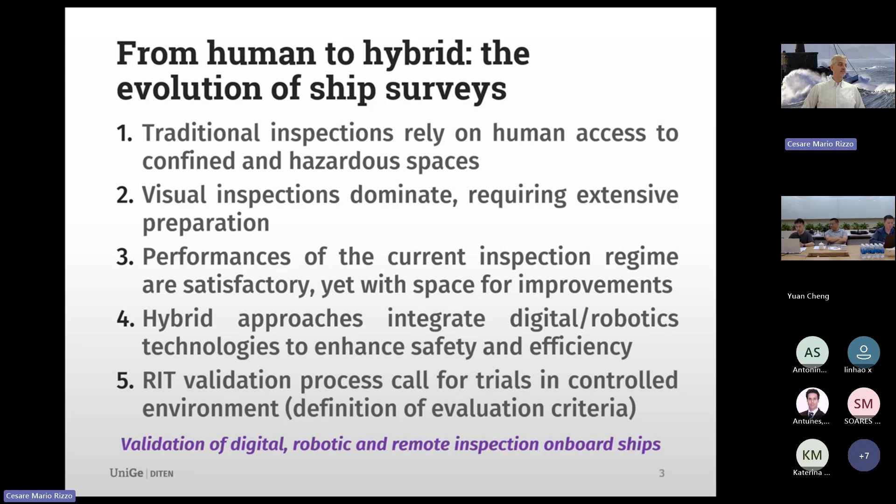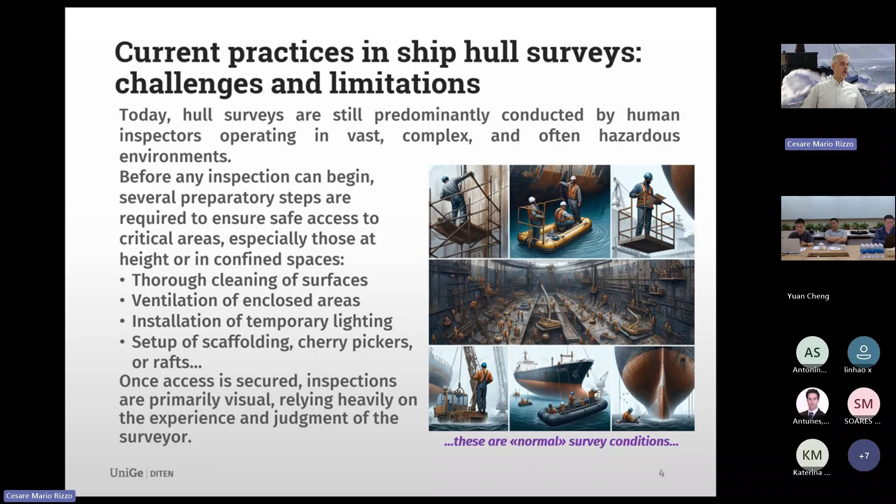Basically, today, I don't have to tell you that the inspections today are human-based, and they are mainly visual inspection, and the means of access are the ones that you well know. And I well remember, because I was a surveyor, what it means to be on a scaffold, to be on a raft, and to work as a surveyor in the field. But let's step a little bit back.

What means an inspection? What is the rational framework for an inspection? We should try to summarize what is an inspection by asking ourselves why we do an inspection. So we do an inspection for safety, environment, efficiency, and everything. And then we should ask ourselves who is doing the inspection, when we do the inspection. So at a point in time, but with the age of the ship,

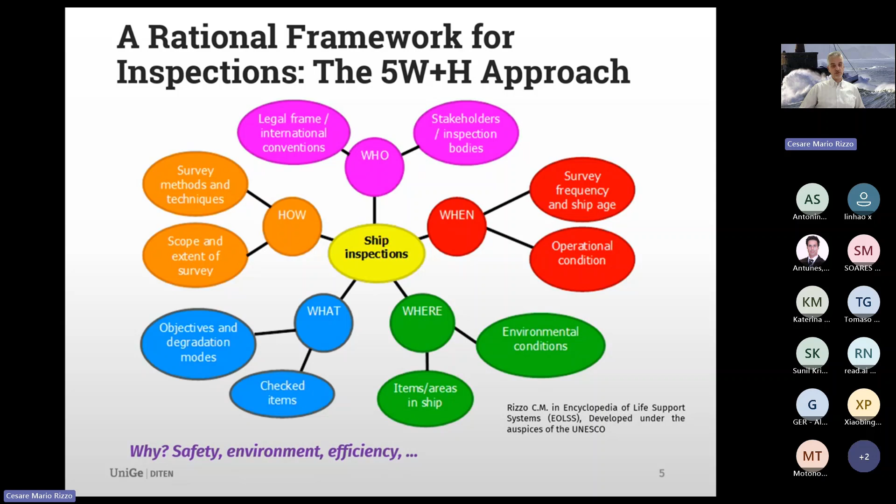which operational condition. So when, in a broad sense, where we do the inspection, where means where we are looking at, or where in the world we are, what we are looking at, which item we are checking, which degradation mode we are looking at, and how we do that. So we are looking at the survey methods, and we are looking at the scope and extent of the survey. And then we have different technologies.

At that time, I mean, 5 or 6 years ago, we started the project, and we tried to involve in the project really 3 or 4 families of technologies. But these families of technologies means not only robots, not only aerial drones, but technology as a whole. I mean, we have a robot, we have a drone, but we have the camera, we have the streaming video, we have the telecommunication, we have the piloting aids, and so on.

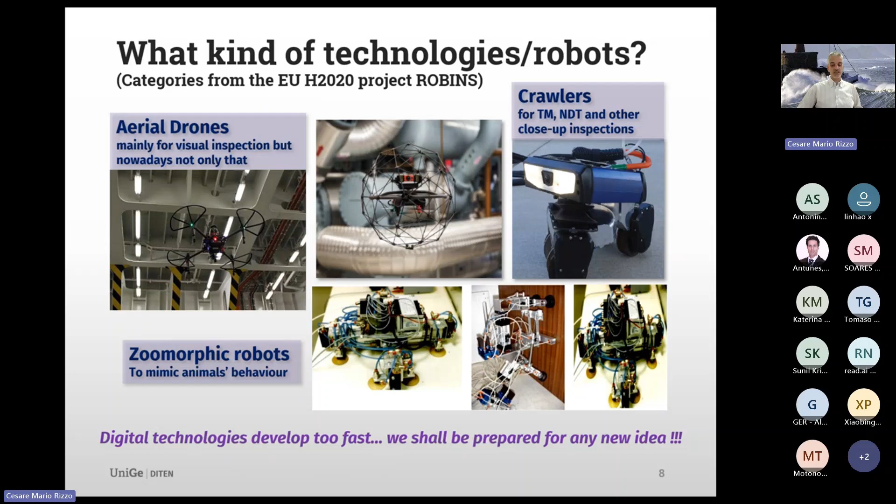So we are trying to use technologies, but these technologies are really developing a lot, and they are developing very, very fast. We shall be prepared for any new idea, but we should also take into account that we are using combined technologies. Thickness measurements 6 years ago were just beginning or maybe not available. Now they are almost available, almost reliable. That means a new era, because we involved a new technology in a combined robot with several other technologies.

But then at that time, and even nowadays, we are asked, which are the challenges in validating the digital and robotic inspection on board? Why we need to validate? It's clear. We need to validate the technology because we would like to have a reliable inspection result. But to do that on board means that we have a limited availability of ships and crews. It may happen, as we saw, that there are some ships available, but not many ships to make a huge statistic.

It's difficult to have a broad range of degradation conditions. You can't have all the degradation conditions and effects you wish to assess. You need to have trained personnel, and that personnel should be trained for novel techniques because technology is advancing. Of course, the guidelines are not available. If we are here, there are no internationally agreed

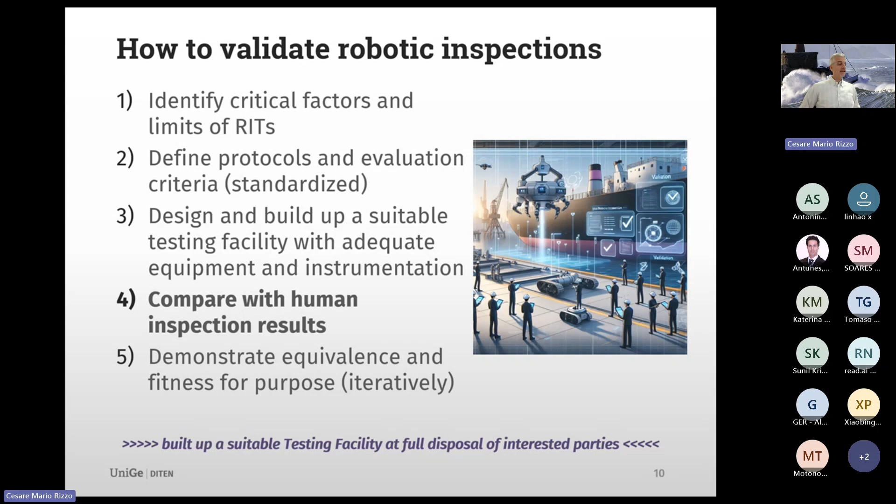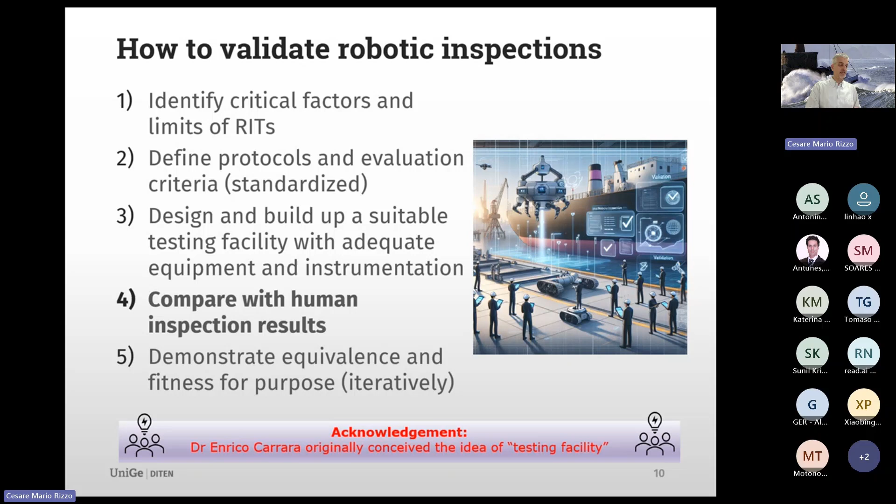And let me say that this idea to create a testing facility for standardizing the validation of robotic inspection came from a colleague that passed away, unfortunately, but he really conceived this idea. And this idea was conceived because of this reason that I'm trying to explain now.

If we think that RIT systems, robotic inspection or remote inspection technologies, are a measurement system, then we need to grant for this system the basic measurement theory principles that are accuracy, precision, repeatability, and reproducibility. These are mentioned in every textbook about theory of measures.

Accuracy. Accuracy means you have to demonstrate the closeness of a measurement with the true or accepted value. But then you need a true or accepted value that is a comparison term, that is the truth for you. Then the truth is hard to define on board. You cannot find the truth, at least because you don't know exactly how many defects you have on board in advance. So accuracy cannot be granted with reliable terms on board.

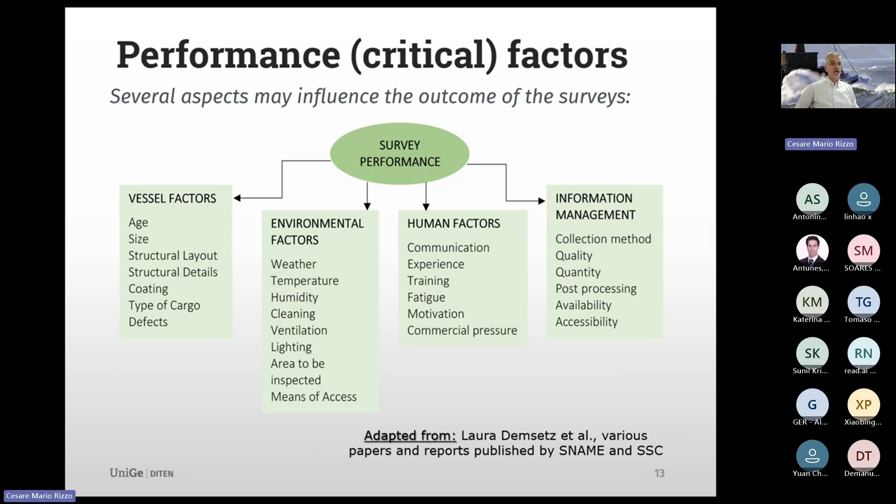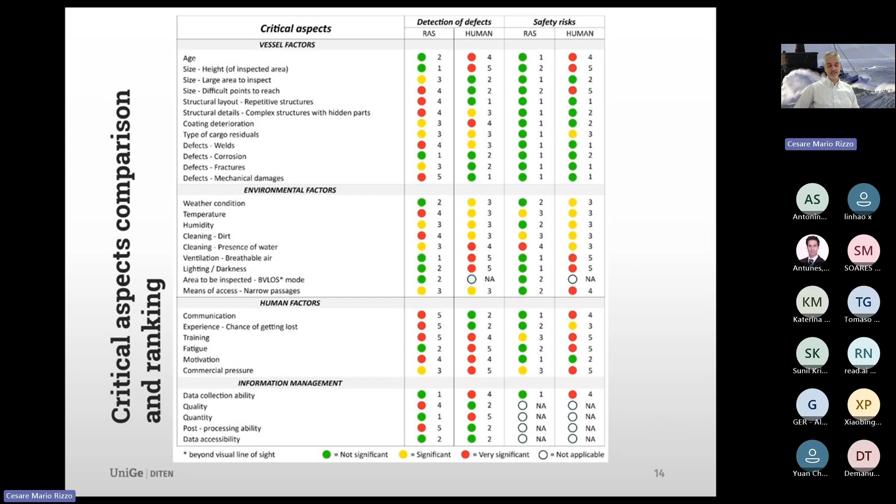I go quick. After that, we really started to define the protocols, the objective evaluation criteria, and to build up a testing facility to carry out validation trials of any robotic technology. I mean, a drone with a pilot with some technologies for streaming and so on. And then we decided to have testing protocols for any new technology you can imagine.

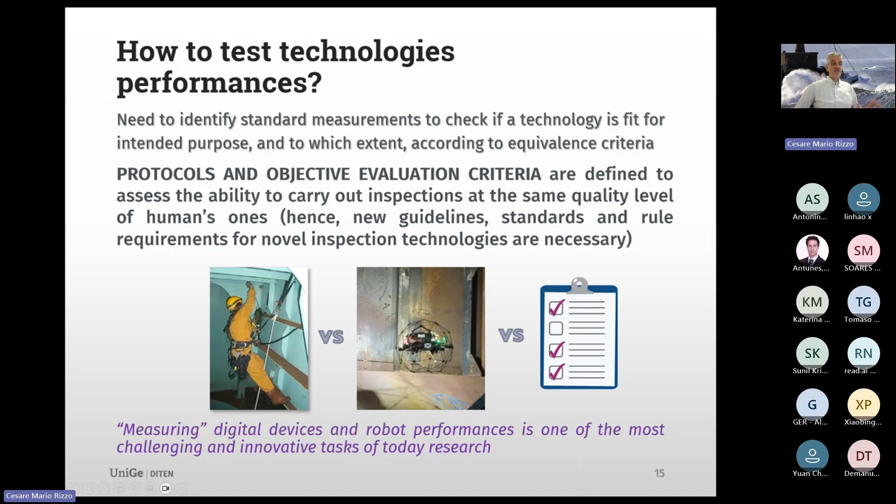How to do that? Demonstrating the equivalence between the robotic technology and the human inspection, but doing that in the framework of a testing facility and a testing protocol. So currently we have several protocols assessing several aspects of the implementation of remote inspection techniques, ranging from piloting skill to operating skill to mobility, dexterity, to the operating time to satisfy the inspection goals, how much time you take for one thickness measurement.

If the human inspector is an order of magnitude faster, we don't need the robotic technology. We need robotic technology that is equivalent, which means also as efficient as a human inspector.

Which kind of preparation and which kind of measurement you are going to take: thickness, of course, but also the shape of a dent, the size of a crack, and so on. And we also need to demonstrate the video streaming effectiveness.

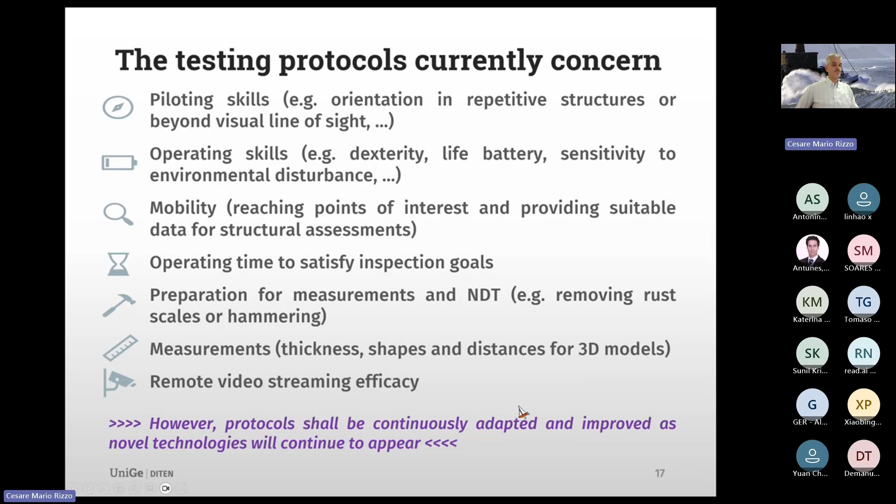So we started to develop this testing facility, and nowadays we have a dedicated environment that is providing some stakeholders an easy and economical way for assessing and developing digital technologies. We have stakeholders coming here to do trials, to discuss with us, to take advantage of our previous experience.

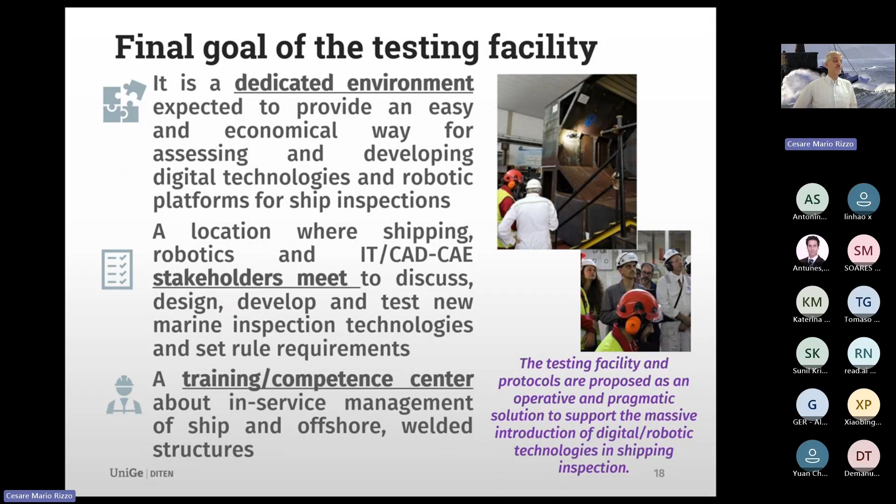We did testing, putting together several stakeholders, but we also realized that we need some training. People involved in robotic technologies are not aware of the problem of the ship, and ship inspectors and surveyors are not aware of the reality of the technologies. We have wonderful technologies that are really ready to be used, but they must be used in a proper way.

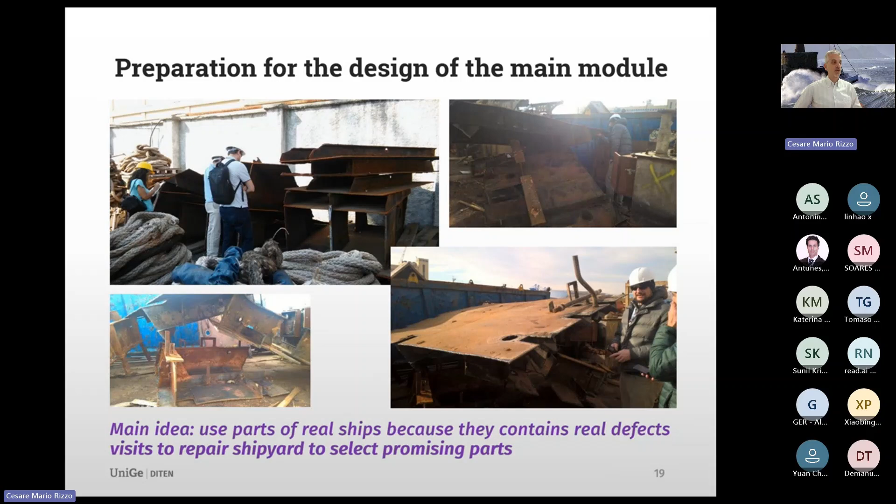So I would be very fast in telling you how we prepared the testing facility and the protocols. We went together with colleagues - these are a few of them involved in the preparation. We went to a repair yard to take parts, then we brought the parts into our lab, and then we started assembling a testing facility that is nowadays shaped like this.

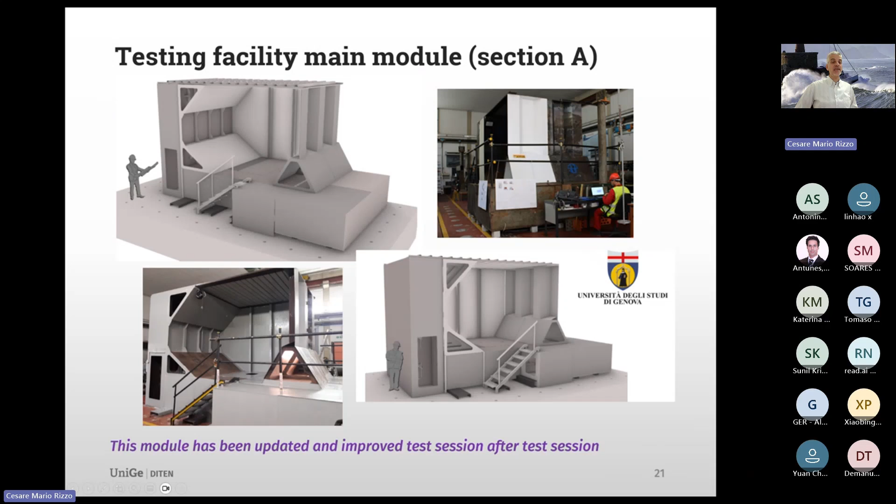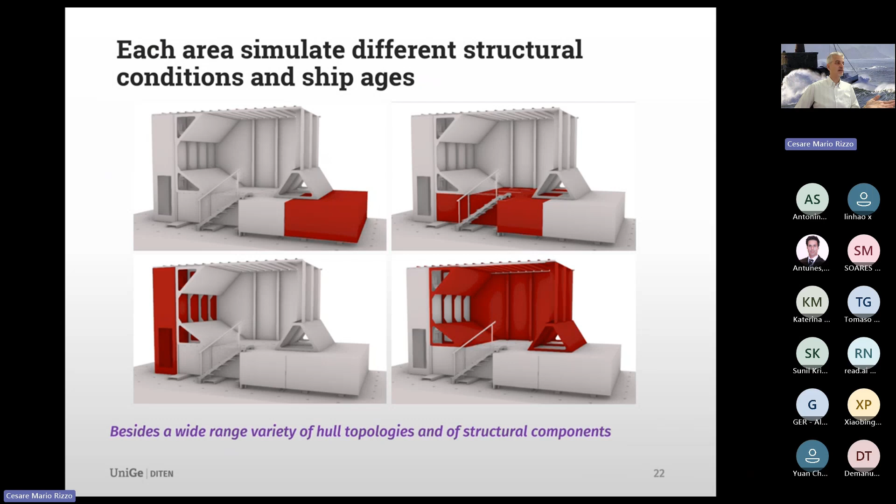This testing facility has been improved during test sessions, one after the others. Section A nowadays includes several parts with different structural conditions, representing different ship ages, different possibilities of lighting, and a wide range of hull topologies, from bulk carrier to bulkheads to double bottom structure, double side structure. So we have several possibilities, and we can create different environments: sprayed water, dark or light, and so on.

And we can create different protocols - different exercises, so to say - for our pilots, robots, and superintendents or inspectors.

They need to work together. We learned that they need to work together, but it's not easy. When you have a ship superintendent or ship surveyor working together with the pilot of a drone, they need to communicate properly. We have a protocol to understand whether they are able to communicate.

This is somehow training, but it's also related to the technology. We need the technology to make the communication possible, not only when the surveyor is not on board, but even when the surveyor is on board. If you are piloting a drone, maybe it's too difficult to communicate with the surveyor - you cannot pay attention to the surveyor communication if you are really concentrated on piloting. So we need to create a protocol also for communication.

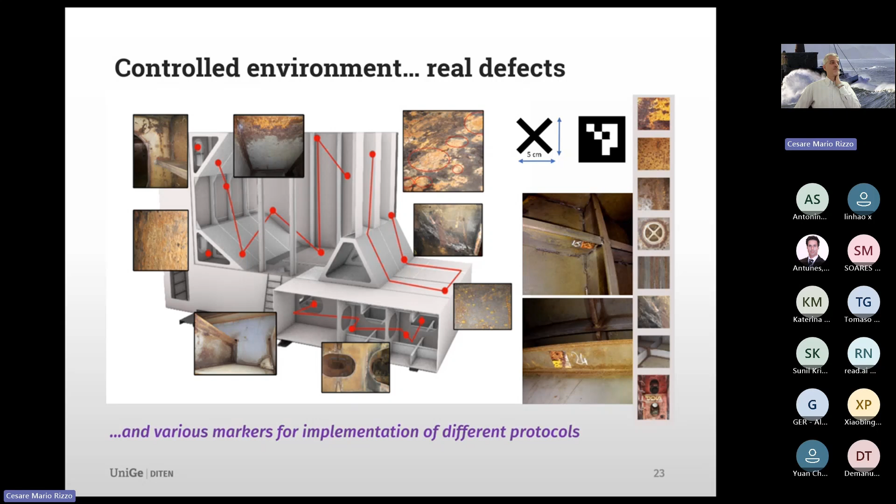Meaning that the training and the technology should be regarded as a whole, as a unique, essential system. And then we created also section B and section C, other parts of our testing facility.

Where we carry out specific testing that assesses very, very specific aspects of the technology. And we are continuously creating new protocols.

One very interesting test is a blind piloting test in a section of the testing facility. You have a pilot - you see in the bottom right of the slide - the pilot is outside looking at what is inside a tank, a cargo hold, and so on, but he is not aware of what is inside.

Then we created several repeated structures. Such repeated structures make some confusion - they are the same color, with no reference point - and basically what happens is that the pilot is lost, is not really able to localize the robot, or to localize him or herself in the space. That is a very important testing protocol we carried out.

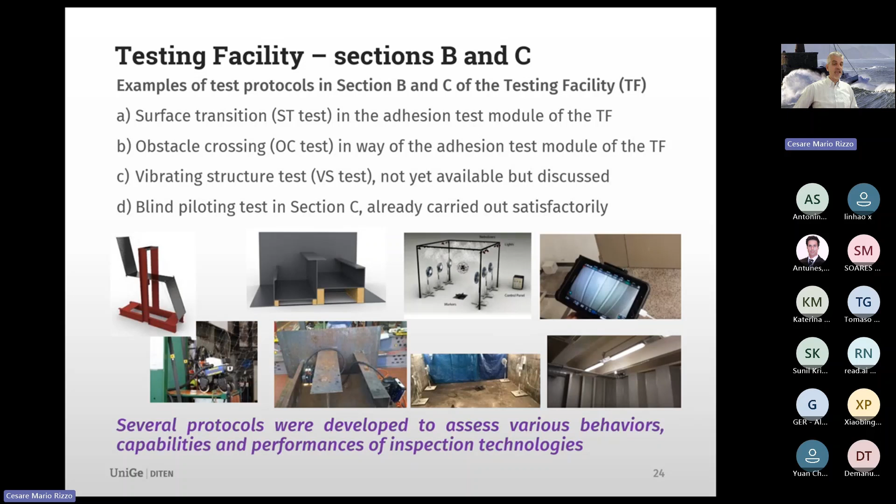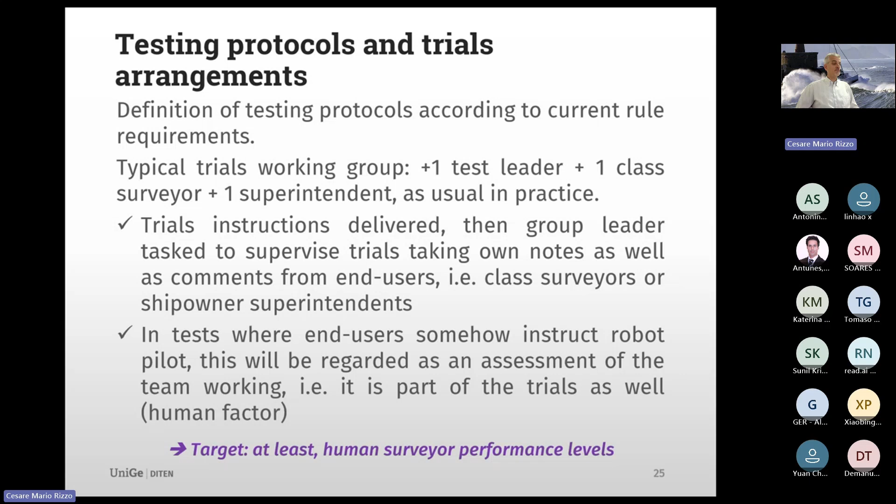And it means that we need again to take into account the human factor. Generally, we have a trial arrangement formed by one test leader - one of us directing the trial - then a class surveyor and a superintendent, depending, and then probably a pilot or someone dealing with the robotic or digital technology involved. Then we carry out the protocols and check whether the performance is at the same level as a human surveyor.

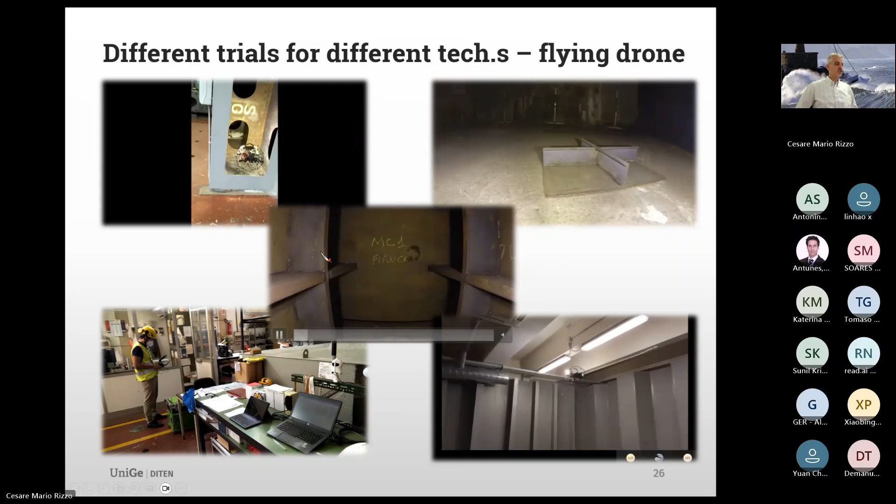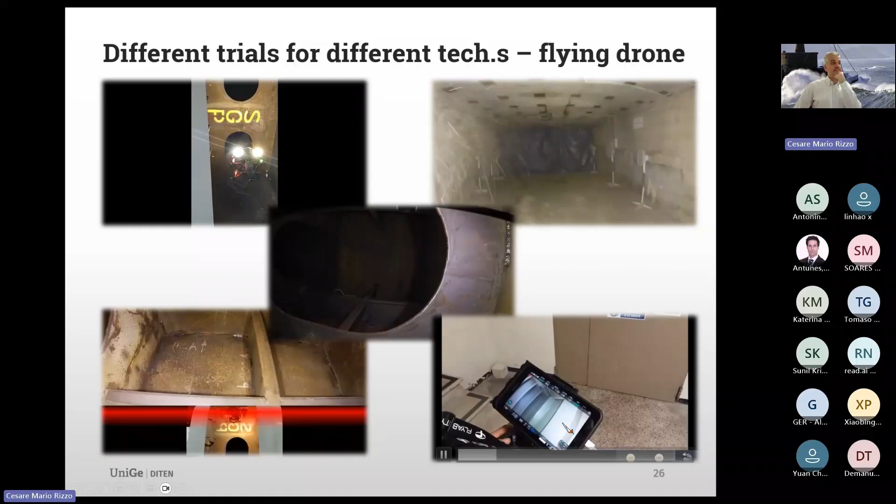For instance, you see here a few videos of the trials, just to show you what is inside the testing facility nowadays. And these are the videos I mentioned - this is another section of the testing facility.

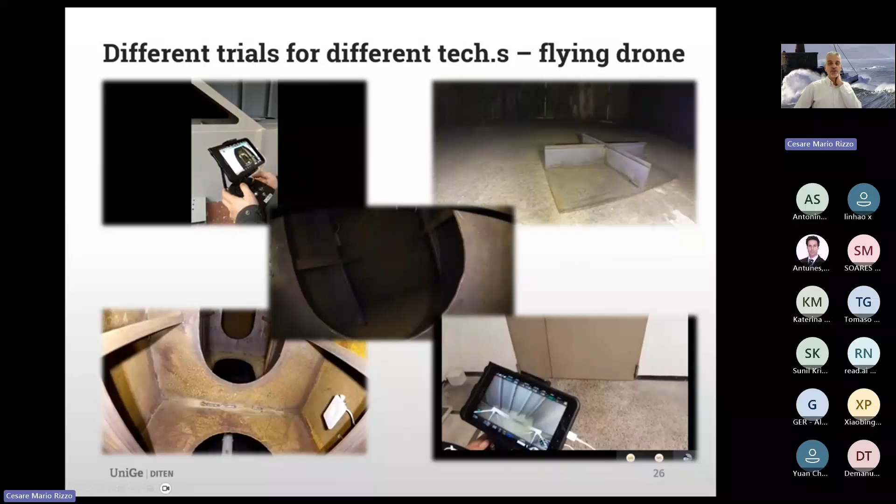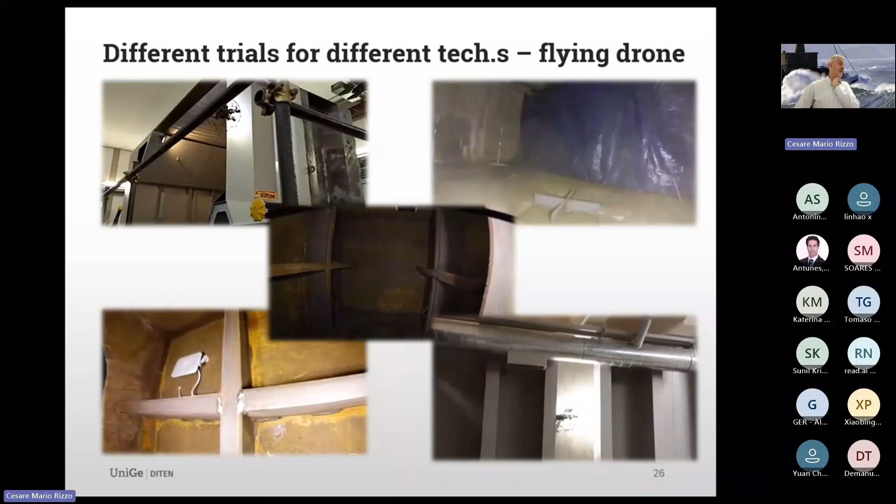Dirt space, dust space - they are really dangerous for robotic technologies. We had a failure of a drone because of the dust at the very beginning. Nowadays, the engines of the drones are protected much better from steel dust.

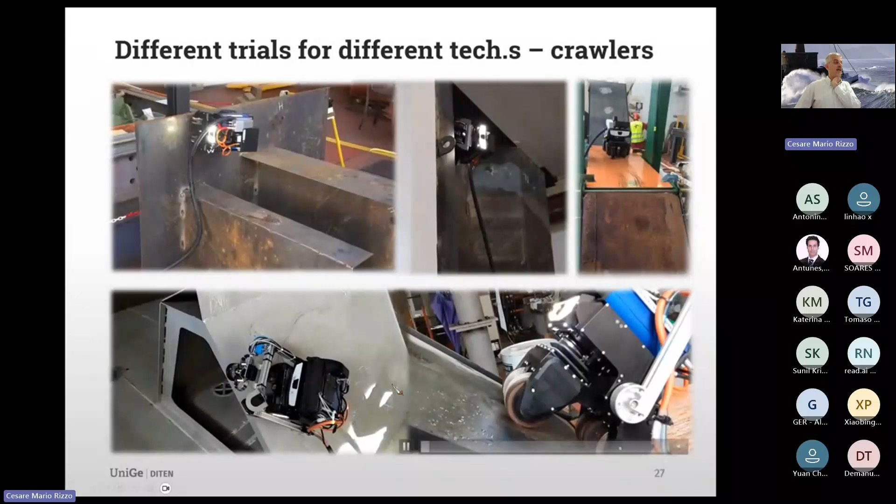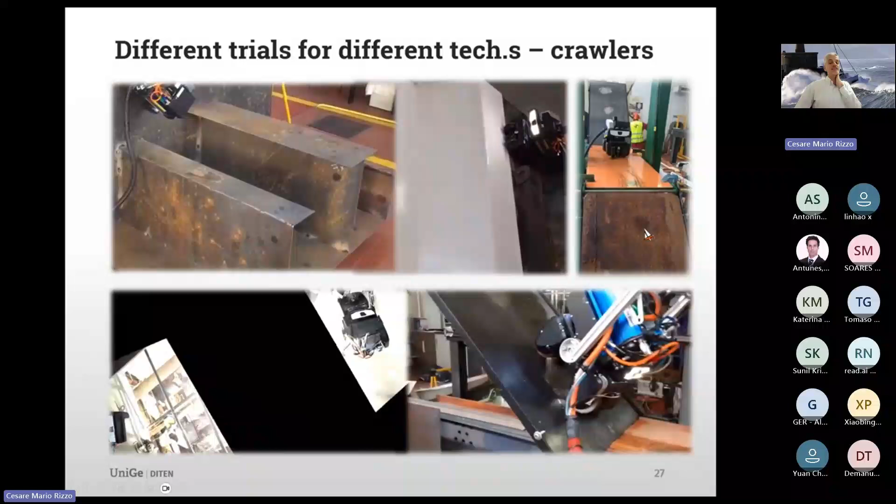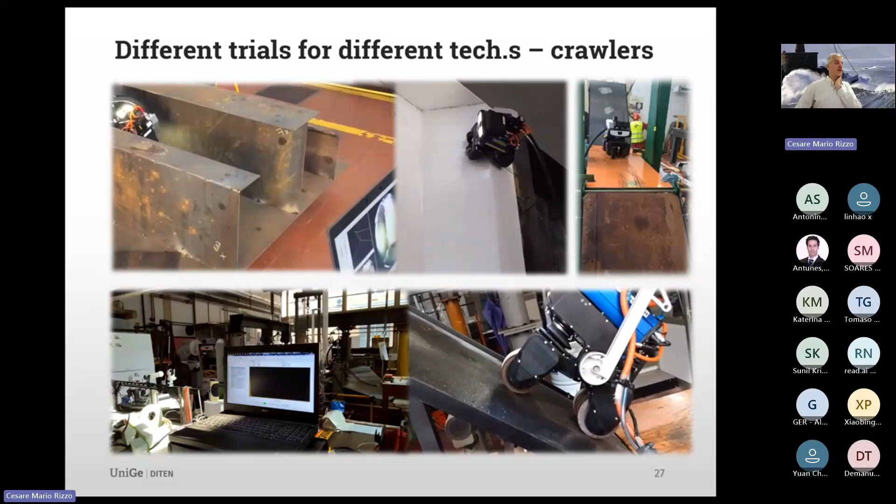Just to show another one, we had this crawler taking measurements and reconstruction with LiDAR. We had several different painted and rusted surfaces. This is to show you that this crawler was piloted from remote - we had the pilot of the crawler in Switzerland, and the inspector, the class surveyor, in UK.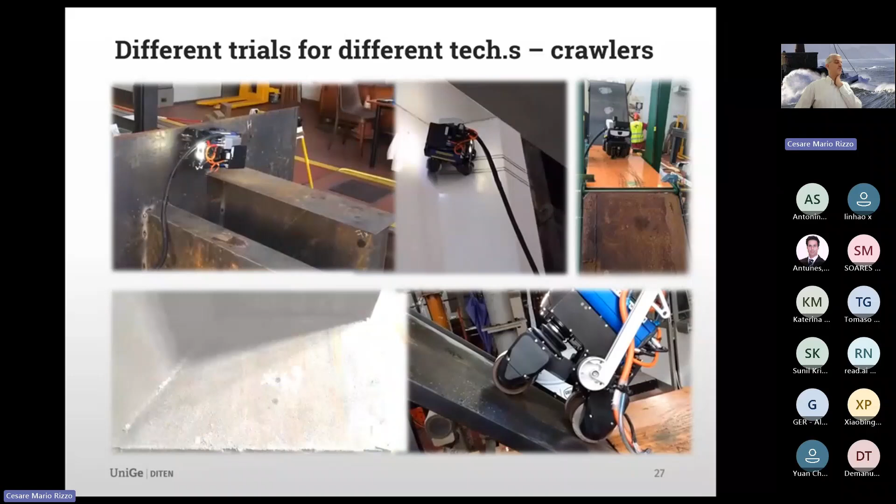Of course, we are in Italy. We had the ship superintendent from the ship owner in Naples. And this was the first trial carried out completely from remote.

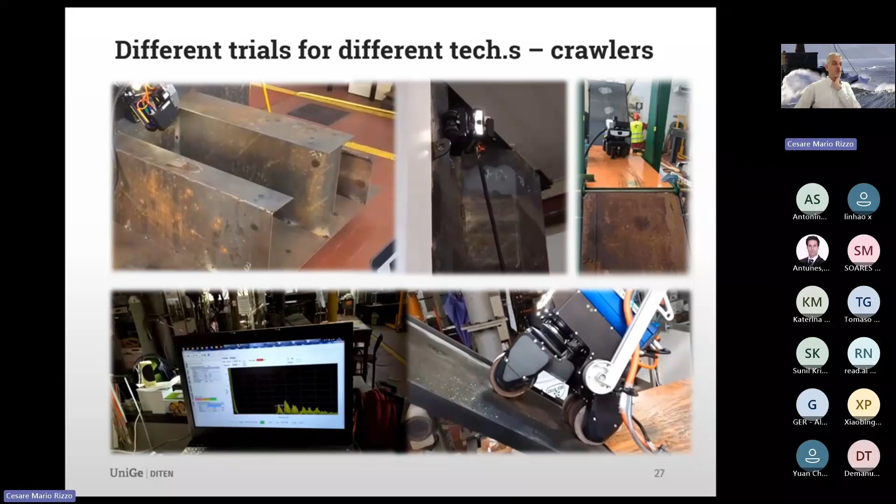But I don't want to forget this part of our trials.

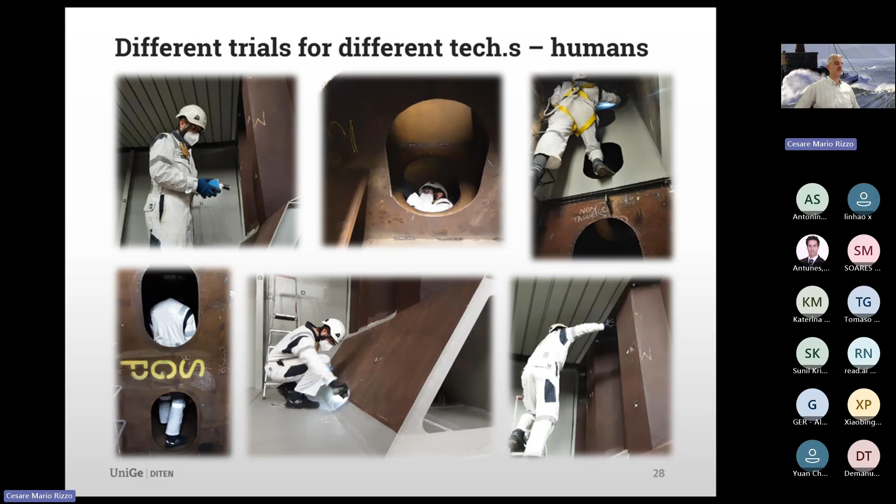All protocols have been also carried out, or can be carried out, by a professional surveyor carrying out in the testing facility the very same protocol that we are going to ask to carry out by the robotic or digital technology, by the remote inspection technology system at large.

And then we have this kind of trial assessment. That means the test records are assessed according to certain parameters that we have found. One of them, for instance, is time. The other is accessibility. And then we have different trial cards that we have associated to any type of protocol.

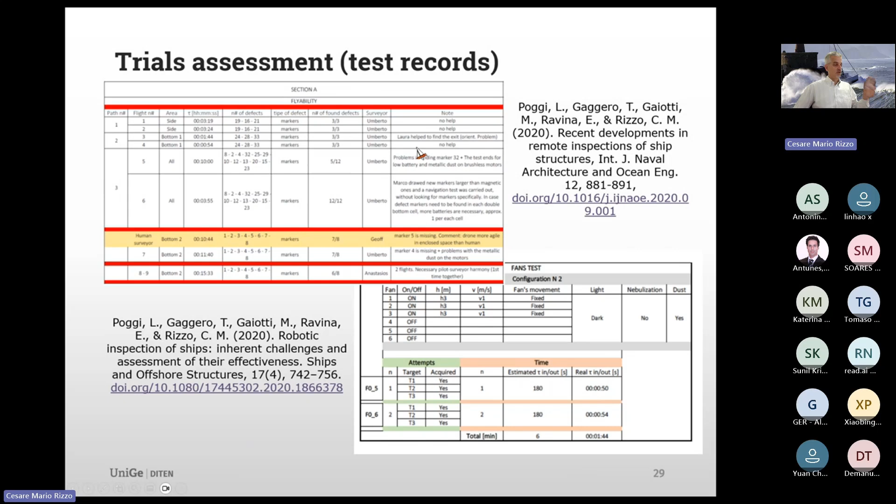And we are continuing to describe new protocols, because every time we have a new technology, we can try to assess the technology in our facility. And I would like to stress again the fact that we have a complete technology, but this technology is used by humans, and the humans need to be involved, to be considered in the validation as well.

We have a team, like any survey, that is the class surveyor, the ship superintendent, and everything is together to create a judgment of the structural condition.

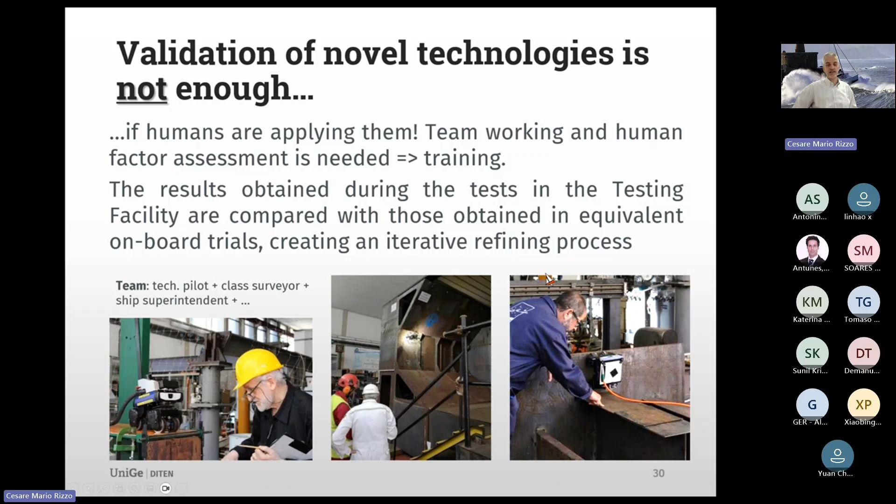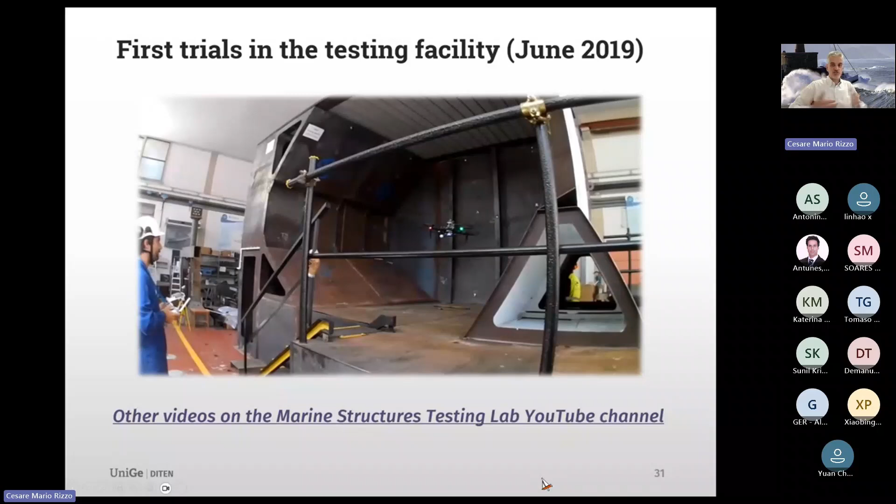So in the end, I would like to show these trials in the testing facility. I will be quite fast. This is the very first trial in the testing facility. You see that at the beginning, the testing facility was not fully painted, was painted only in certain parts. But then in the years, we evolved.

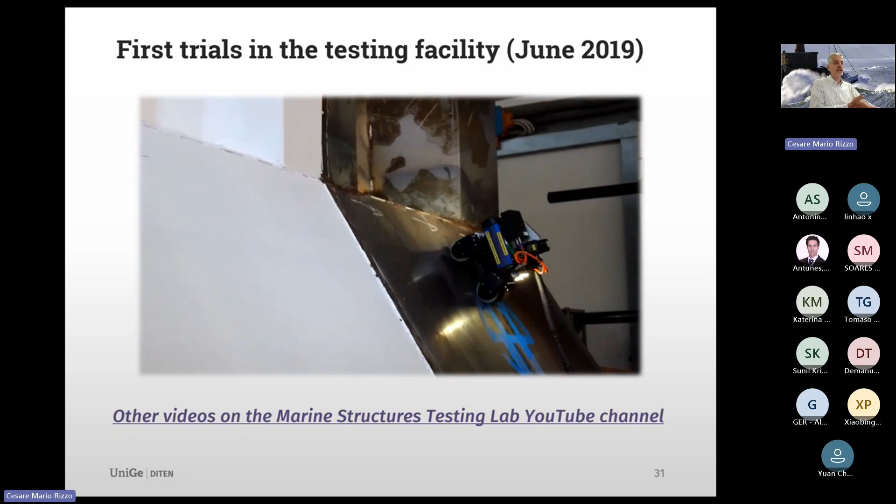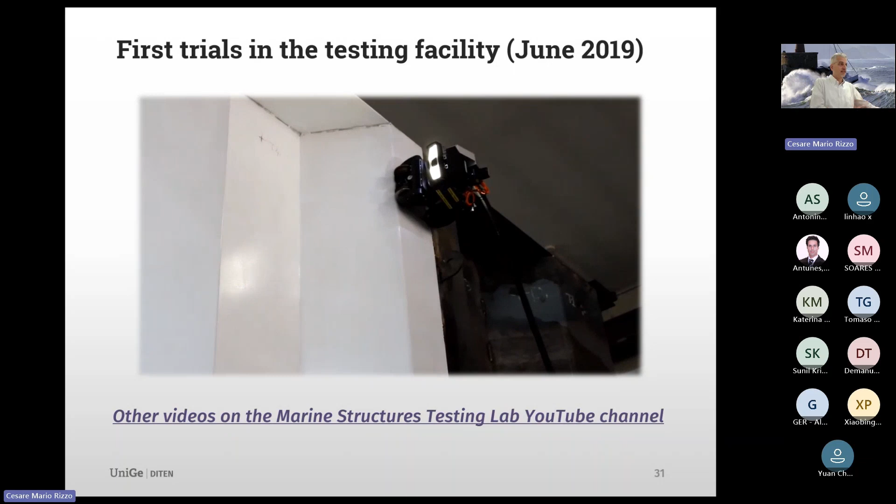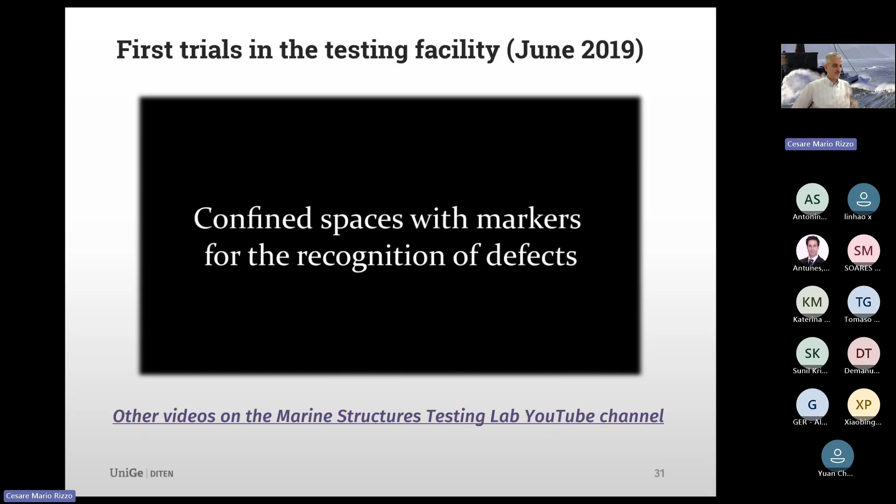We painted the surfaces because we carried out some adhesion tests of a crawler, and we realized that the coating can be ruined by the crawler, and then we need to take care of that. So the technology should not destroy the coating. And nowadays this crawler is perfectly okay. The robotic developer was able to improve the technology somehow, beside validating it.

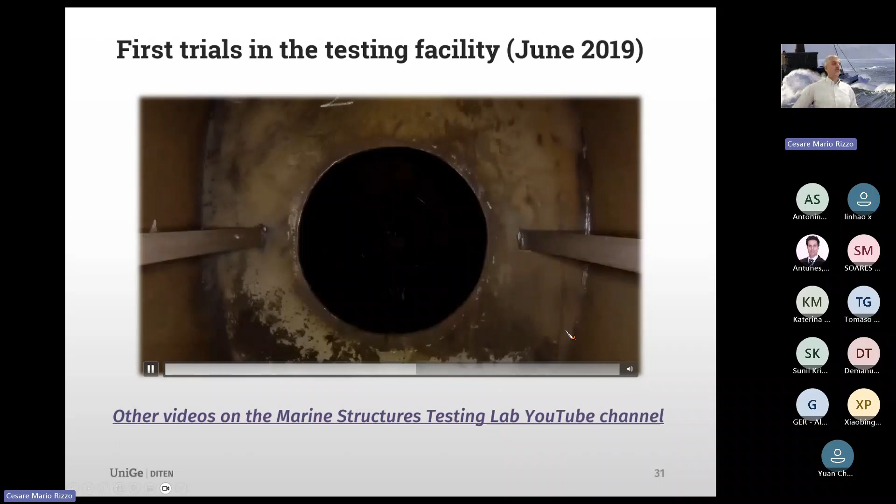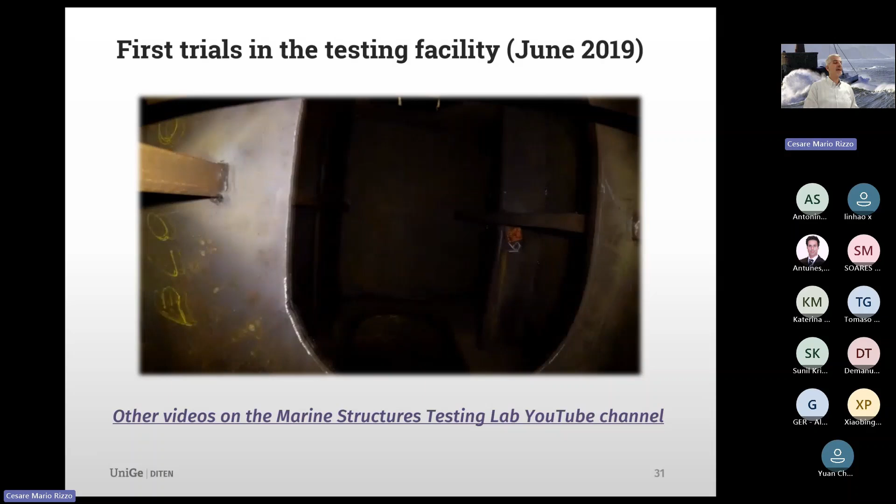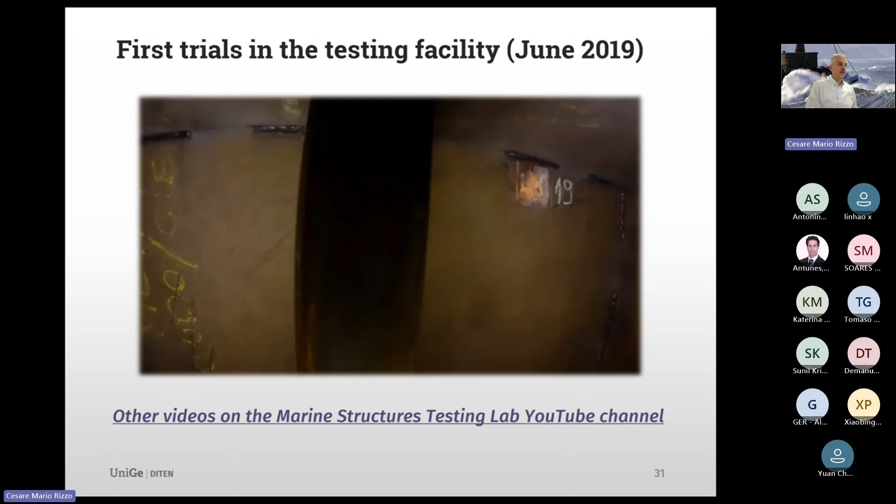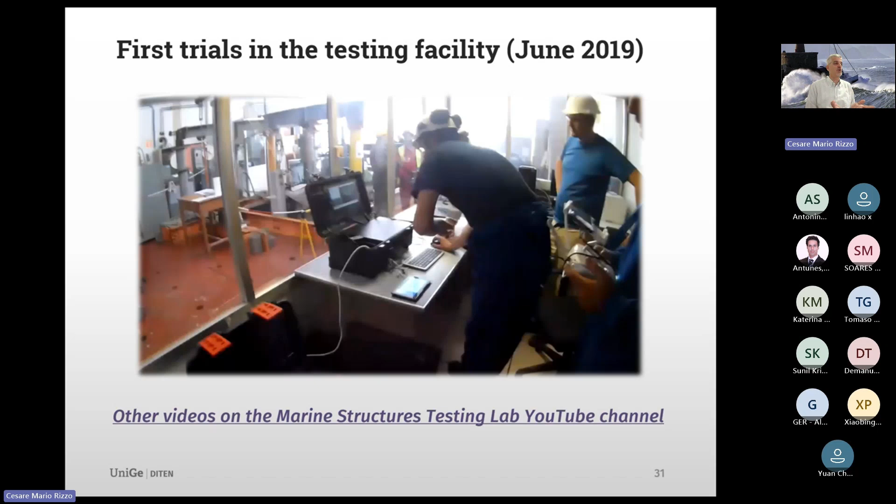And we realized several possibilities. We created some markers. For instance, now we have markers that can be moved around the testing facility, so that the many defects in the testing facility can be changed, and we can create new paths to have a blind trial. If you carry out a trial, then the same pilot is now aware of the defects. The test is not anymore the same test as before.

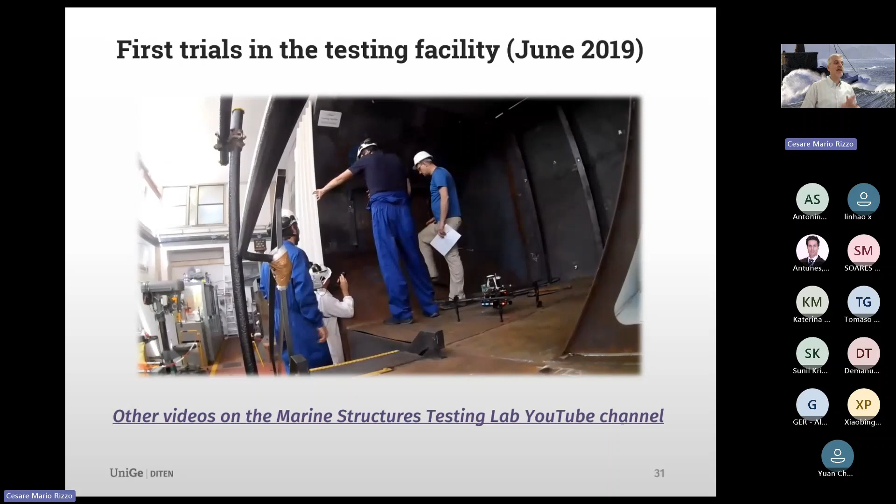When a surveyor boards a ship, he is going to inspect something completely unknown, but then we need to reproduce the same trials, so we need to have some new thing to see, and then we cannot repeat the trials in the very same way, with the very same surveyor.

So what we are doing now, training is a focus for us. Training and validation continue to be a focus. We are now engaged with autonomous technologies. This is, of course, future of research. We are discussing about coating.

We are discussing about looking at the weld seam, so welding process, repairs, and so on. We are still looking at harmonization in a goal-based perspective of practical procedure training, and to speak a common language in digital technology is very important in our opinion.

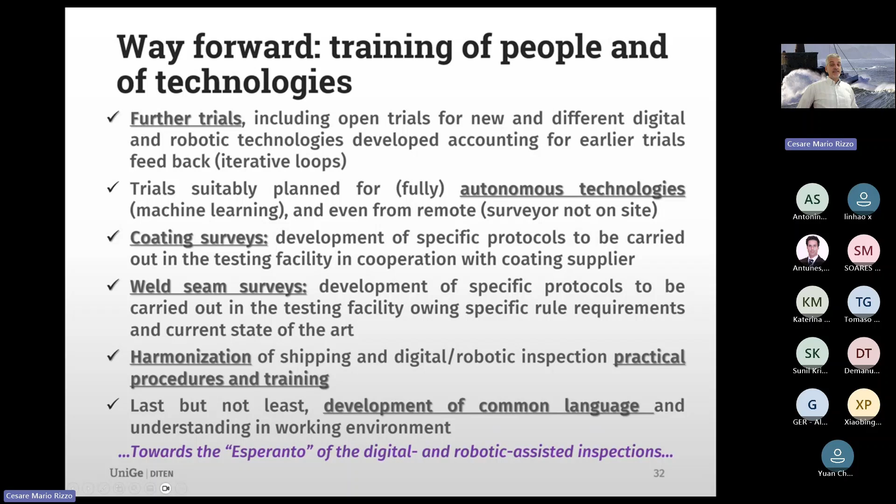And the last focus that is nowadays the focus of our research, because of two national projects, is the remotization of our trials. I mean, we are trying to carry out our testing from remote, in the sense that for the time being, someone can send here a robotic technology or a drone or whatever you have in mind.

And then we have now in the testing facility a set of cameras that can be deployed to see the trials from remote. And the idea is that, of course, we can test the remote inspection, meaning that someone is looking at the inspection carried out on board from remote. I'm not telling that we need to do that now, but we are looking at this possibility.

But also, we would like to collect videos, and these videos could be from robot cameras, but also from our own cameras. And these videos will be used for research purposes to improve the system autonomy. So we can have the possibility to review these videos and to help in finding defects in the video.